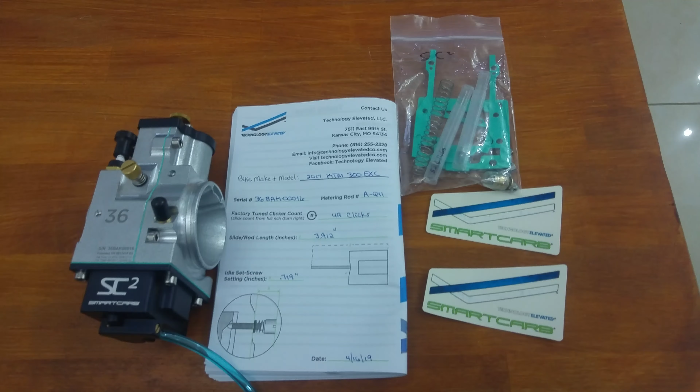I want to make a quick preview of a new carburetor I just got from Technology Elevated. This is the SmartCarb 2.

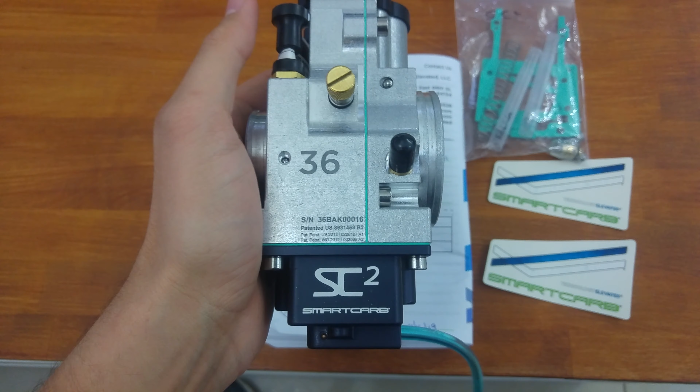This is the billet aluminum version, which is quite heavy. It weighs around 950 grams, which is almost 2 pounds. It feels solid and very, very high quality.

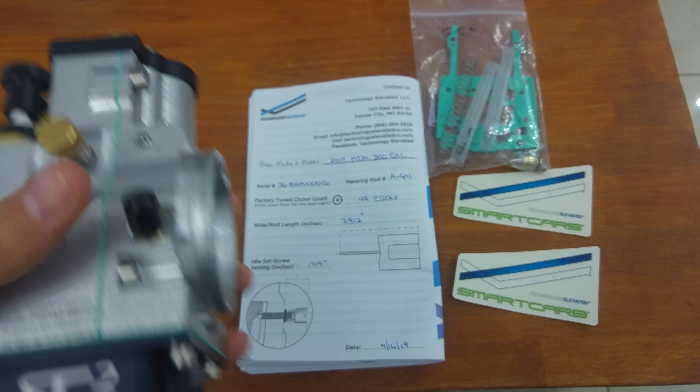This is the 36 millimeter. The stock Mikuni that I have on my KTM is 38, but Technology Elevated recommended I get the 36 for my riding style, and for better fuel economy.

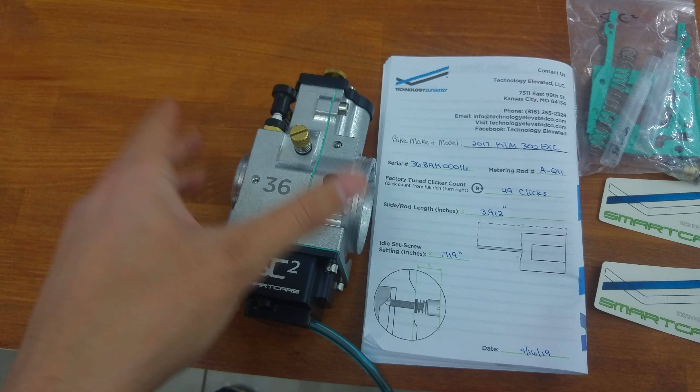The SmartCarb 2 allows you to plug and play the carburetor onto your new KTM bikes and all the modern 2-stroke bikes because of the shorter body length, so there's no need to do any mods to the air boot and all that like the previous one.

This eliminates any need for jetting. So there is no jetting, no jets, no nothing. There is only this metering rod, and that's it.

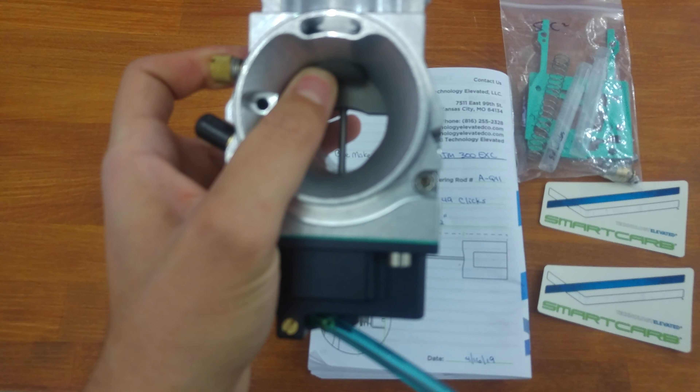You can do some adjustment using this slow speed clicker adjuster, and of course you have the idle screw and choke.

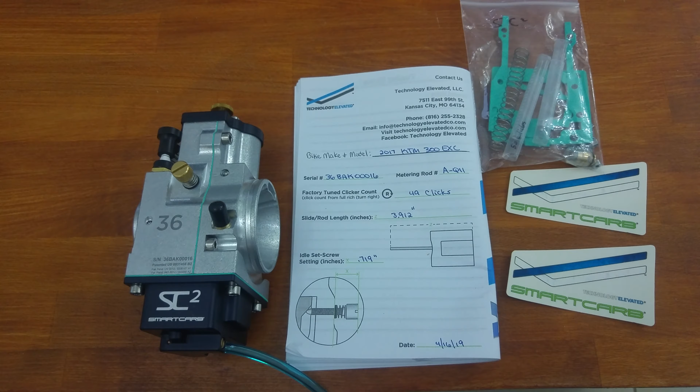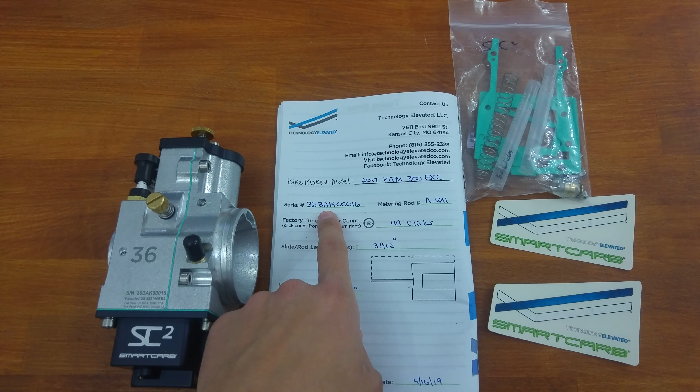It comes pre-configured from the factory. You just need to provide them the bike model that you have, any engine mods that you did, and riding style, and that's it. They give you the metering rod that they used. Of course, you have the serial number, which you can provide so they have all the information about your carburetor.

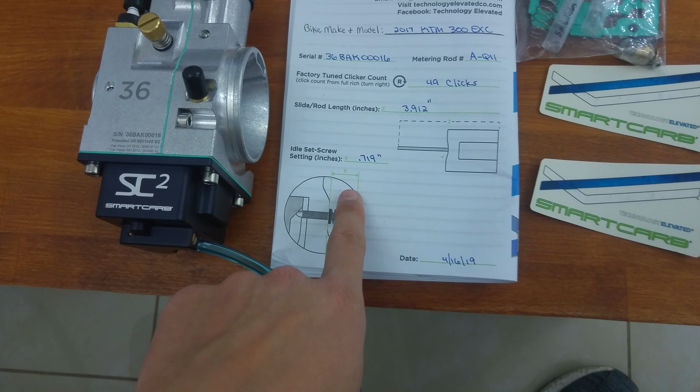The slide rod length, which is how deep it is, and the idle screw settings, and the number of clicks that you have on the adjuster on top.

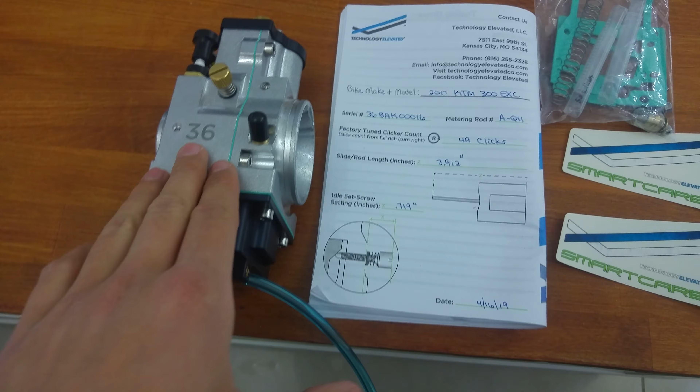If you tip over using this carburetor, there's no need to close the petcock of the fuel tank because this carburetor is sealed, so no fuel spilling and no need to worry about this.

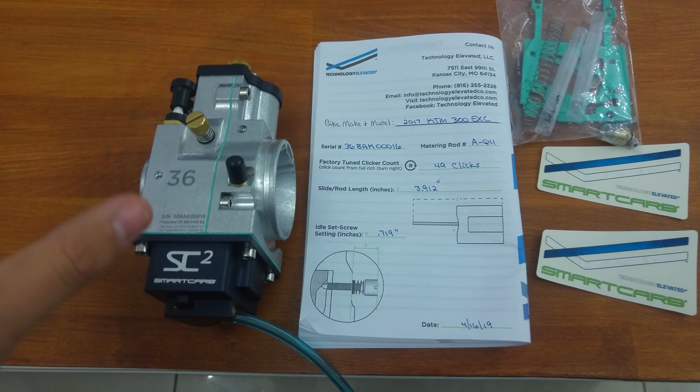The only hose that you have is for checking the fuel level on the float bowl, or if you want to drain the fuel from the bowl itself to do any maintenance that you want.

I also bought, by the way, this manual. It's a printed color manual, very nice, with lots of details inside it. You need to read this, I think, before you use this carburetor. You can plug and play it, but you should read this.

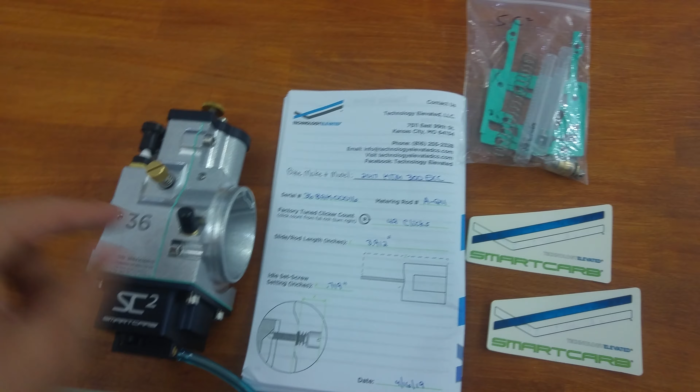By the way, this carburetor price is $700. It's pricey, but I think it's worth it for what you are getting. It's better than the Lectron because it has more grunt power, so more torque from the bottom, better fuel economy, better horsepower increase, and no fuel spillage, so it's great.

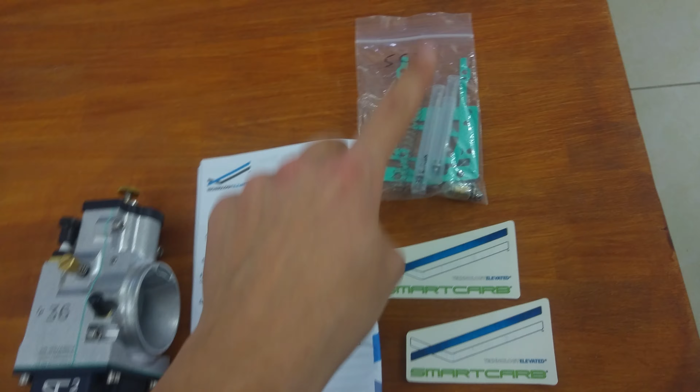Also, I bought the rebuild kit, which includes all the seals that you need, and the return spring and all that, and needles and bolts.

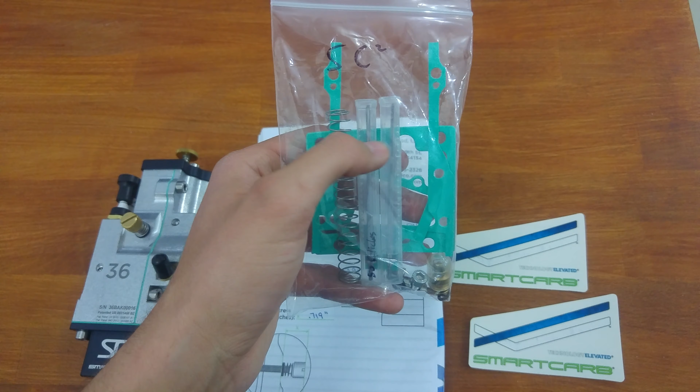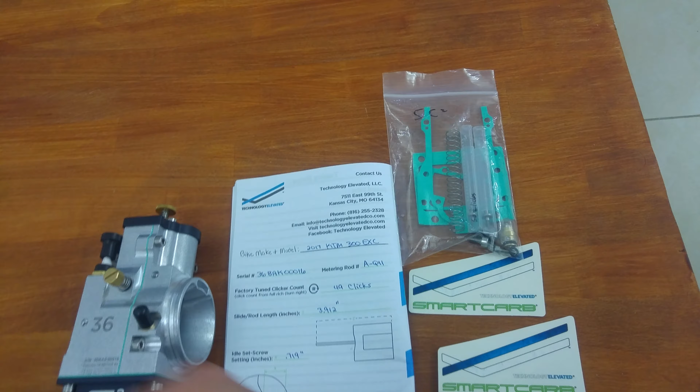I also ordered 2 additional metering rods, one leaner and one richer. Because I'm located in Israel, it will take time if I need another metering rod, shipping the current one to the US and replacing it. So I bought these 2. I paid for them, but once I get my SmartCarb optimized for my bike and riding style, I can send those 2 back and get a full refund, which is great.

Their customer service is very, very good.

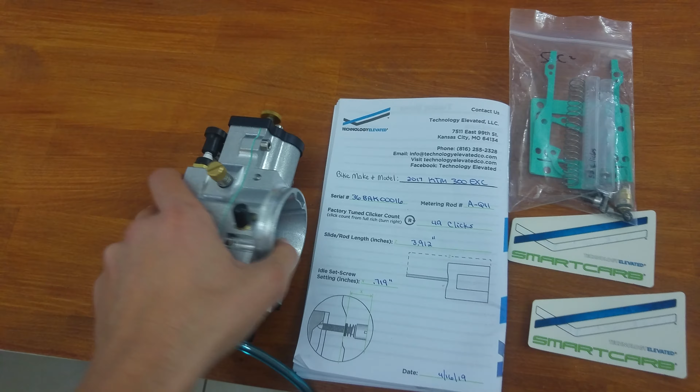I'll make a full review and comparison between this carburetor and the stock Mikuni one, with some testing head to head. This is a really short preview.